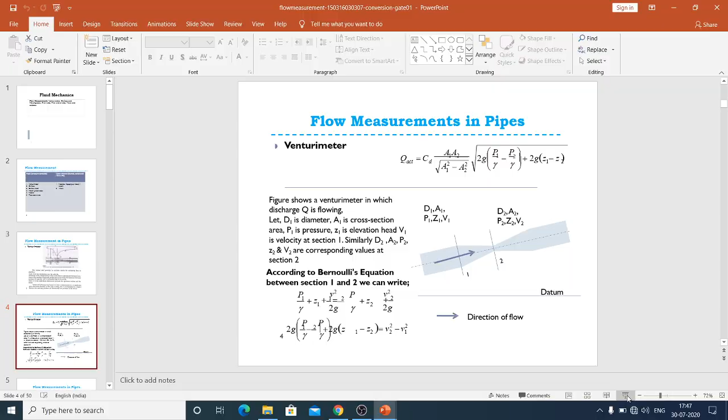Next, if you take the limitations of the Bernoulli's theorem: the Bernoulli's equation has been derived on assumption that the velocity is uniform over the section. First thing, limitations of the Bernoulli's theorem. Limitations. Limitations of the Bernoulli's theorem.

First point, the Bernoulli's equation has been derived on assumption that the velocity is uniform. It should be uniform over the section. But actually the velocity of liquid particle is maximum at the center of the pipe and gradually decreases towards the pipe wall due to friction. If you draw the velocity distribution diagram in the pipe, it seems to be like this. The maximum velocity you can see at the center of the pipe, minimum at the edges of the pipe.

Why? Suppose this is the pipe. In this pipe the water is flowing like this. The maximum velocity you can see at the center, minimum velocity at the boundary of the wall of the pipe inside. Why? Because you can see here the friction. Due to friction the velocity will be decreased.

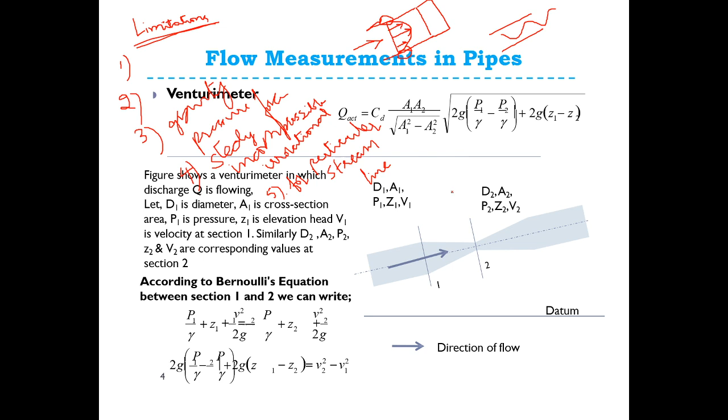If you see the practical applications of Bernoulli's theorem, the Bernoulli's equation is applied in all problems of incompressible liquid flow where energy considerations are involved. The other equation commonly used in problems of liquid flow is the continuity equation. Both these equations are widely used in the solution of many problems of liquid flow. Some hydraulic devices based on Bernoulli's equation are venturimeter, orifice meter, and pitot-static tube. These three work on the principle of Bernoulli's theorem.

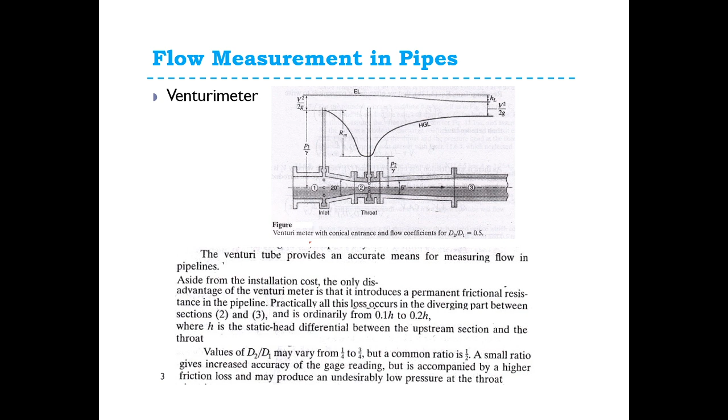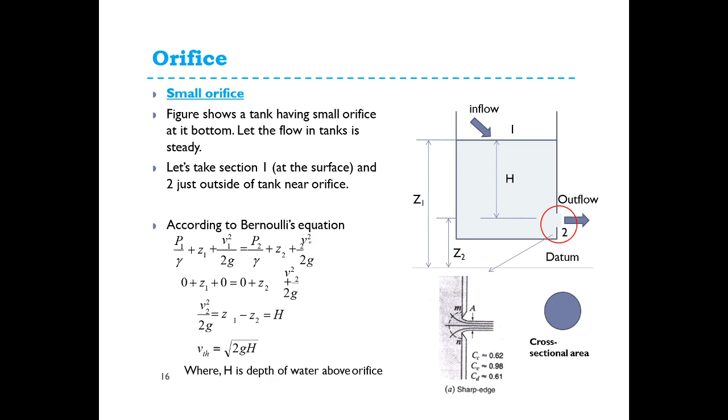Bernoulli's theorem. So here let us see the venturimeter. Already we have studied about the venturimeter. As per your syllabus, we have only the pitot tube. Orifice meter already we have studied. Orifice meter is a device. Do we have orifice meter? Nozzle, mouthpiece, orifice, coefficient of orifice meter.

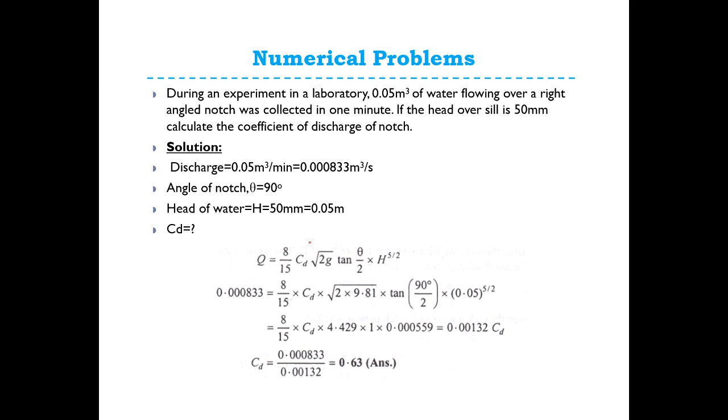First of all, pitot tube measures the sum of velocity head and pressure head. Piezometer is used to measure pressure head. You should keep it in your mind. This is very important from the perspective of ESET and competitive exams. Pitot tube is used for velocity head and pressure head. If you want to find out the pressure, we will use piezometer.

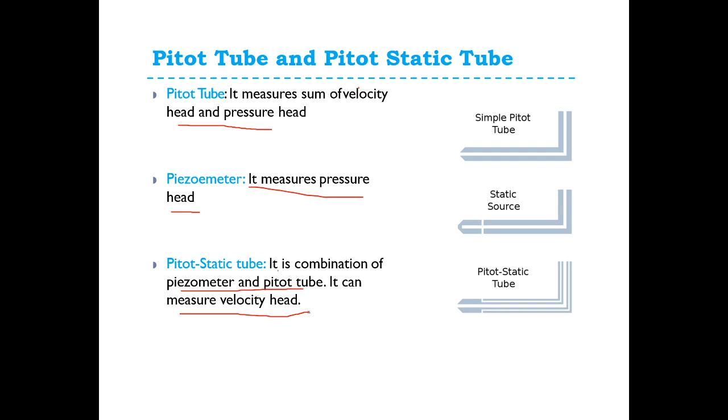Pitot-static tube is a combination of piezometer and pitot tube. It can measure velocity head. If you want to find out the velocity head, you will use pitot-static tube. As per your syllabus, we have pitot tube, not a pitot-static tube. Pitot tube is there, same like this.

Okay. Pitot tube is a device used for measuring the velocity of a flow at any point in a channel or a pipe. It is based on the principle that if velocity of flow at any point becomes zero, the pressure there is increased due to conversion of kinetic energy into pressure energy, and by measuring this increased pressure energy, the velocity of flow may be determined.

You have to increase the pressure due to conversion of kinetic energy into pressure energy. By measuring this increased pressure energy, the velocity of the flow may be determined. A pitot tube consists of a simple glass tube. This seems to be like this, simple glass tube. This is glass tube.

Okay. If you take this is the pipe, you have to insert inside the pipe like this. This is the pipe, you have to insert like this. From here, from bottom to top, this level is P by W, pressure energy, plus kinetic energy, V square by 2G. V square by 2G. Okay.

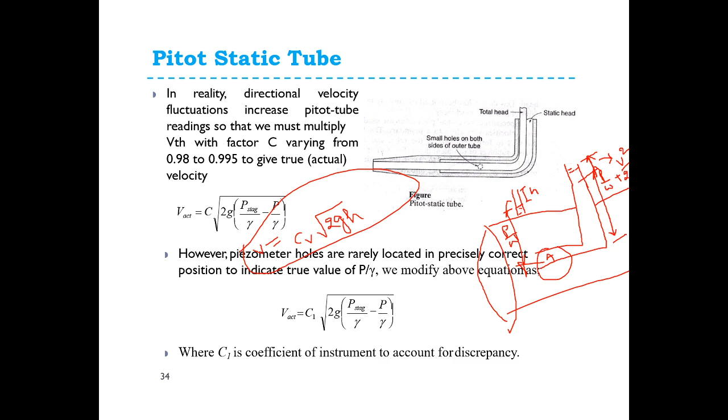Here, if h be the rise of liquid in the tube above the free surface, then actual velocity of flow is coefficient of velocity under root of 2gh. Okay, this is the actual velocity. Actual velocity is Cv under root 2gh. Here Cv is 0.98. You should keep in your mind. This is important. If you take the orifice meter,

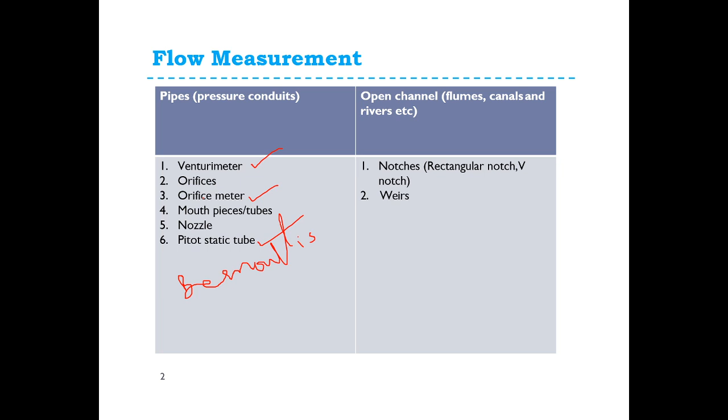this is also used to measure the rate of flow through a pipe. Venturimeter, here I am writing, it is used to find out the pressure. Orifice meter is a device used for measuring the rate of flow or discharge. Orifice meter is used to measure the rate of flow. Next one is pitot tube. Pitot tube is used to measure the velocity.

Okay, now we are discussing about the orifice meter. It also works on the same principle as that of venturimeter. It consists of a flat circular plate which has a sharp edged circular hole called orifice. We have to put two piezometer tubes here and there. Here it will show the reading. This is the pipe. For pipe we have to add some piezometers at two sections.

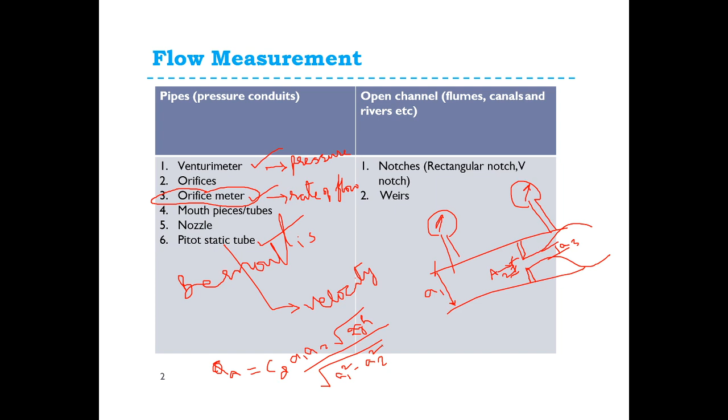Then if you want to find out the discharge in the orifice meter, that is the rate of flow, Q equal to Cd into A1 A2 under root of 2gH divided by under root of A1 square minus A2 square. Okay. So this is the formula to find out the discharge in the orifice meter.

Water is flowing from here to there. Here this is A1 at point 1. This is A2, the orifice. The diameter of the orifice may vary from 0.2 to 0.85 times of the pipe diameter. If you take this diameter as 1 meter, the orifice diameter varies from 0.2 to 0.85 times of the pipe diameter. But generally it is kept as half of the pipe diameter. If the pipe diameter is 10 meters, this should be treated as 5 meters.

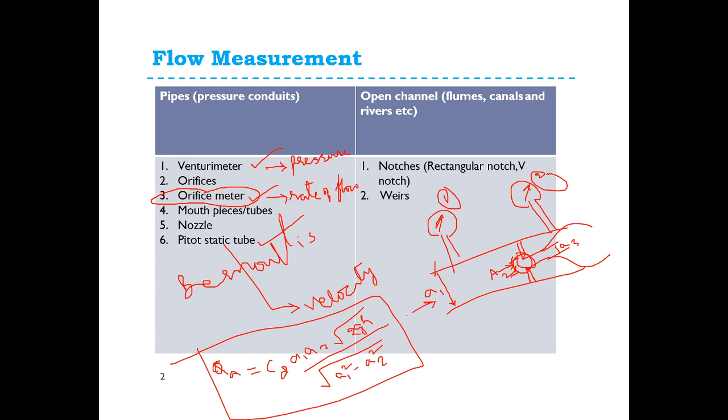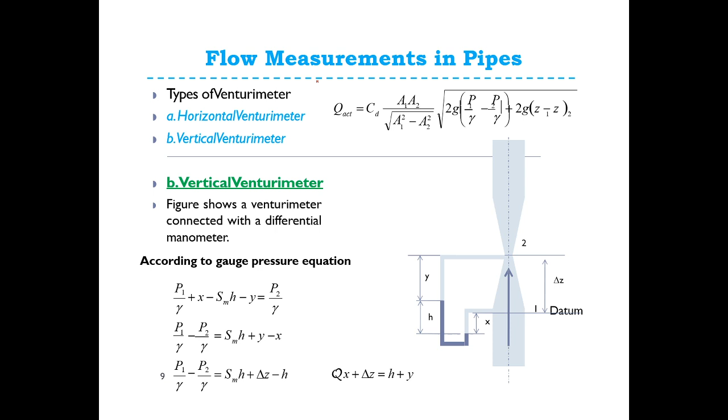Okay, either pressure gauges or differential manometer is connected at section 1 and section 2. Piezometer tubes or differential manometers we have to connect. Okay, so this is the orifice meter. With the help of this equation, you can write. All these are the formulas. Okay, right.